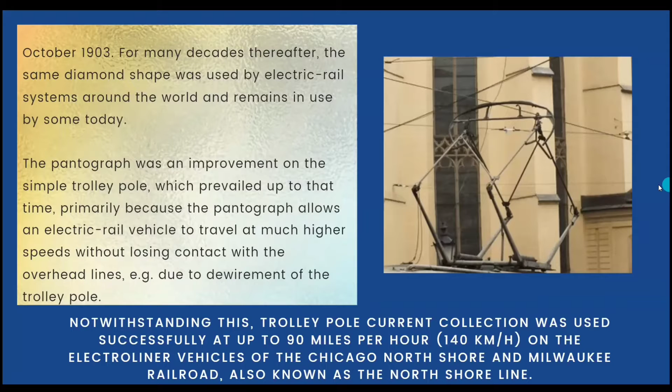Louis Faiveley invented this type of pantograph in 1955. The half pantograph can be seen in use on everything from very fast trains, such as the TGV, to low-speed urban tram systems. The design operates with equal efficiency in either direction of motion, as demonstrated by the Swiss and Austrian railways, whose newest high-performance locomotives, the RE460 and Taurus, operate with them set in the opposite direction.

In Europe, the geometry and shape of the pantographs are specified by CENELEC, or the European Committee for Electrotechnical Standardization.

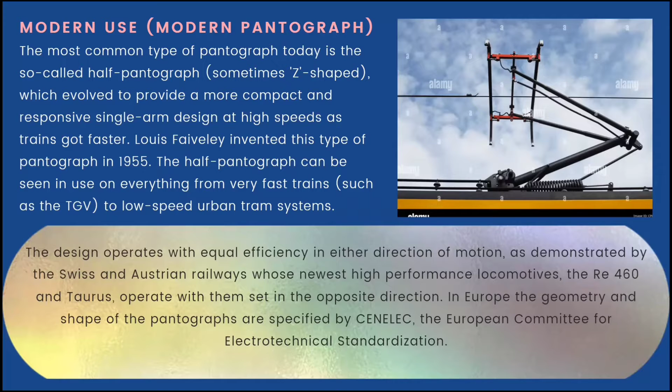Pantographs are current collectors that transfer the electricity from the catenary to the train motor. The sliding strip creates the electrical contact to the catenary wire. A pantograph spring system ensures permanent contact at any speed. Even at speeds greater than 400 km per hour, the high-speed pantograph by Schunk guarantees uninterrupted electric current transfer.

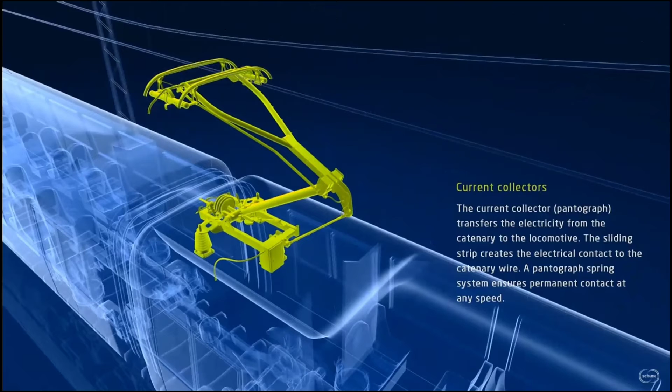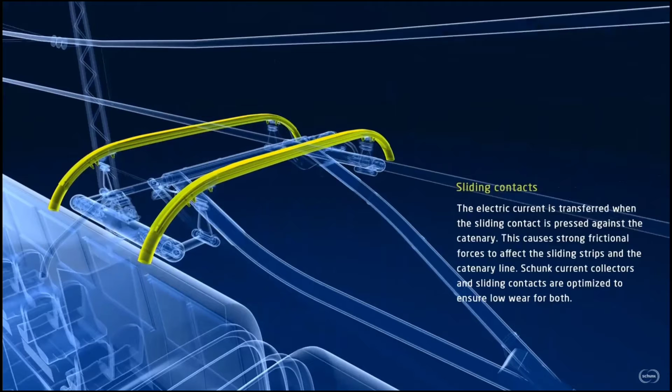The sliding strip performs an important function. As it is pressed against the catenary, it ensures electric current transfer. Strong frictional forces take effect here on the sliding strip and the catenary line. Schunk has designed the structure and the material of the current collectors and sliding strips such that the sliding strip and the conducting wire are subject to a very low level of wear.

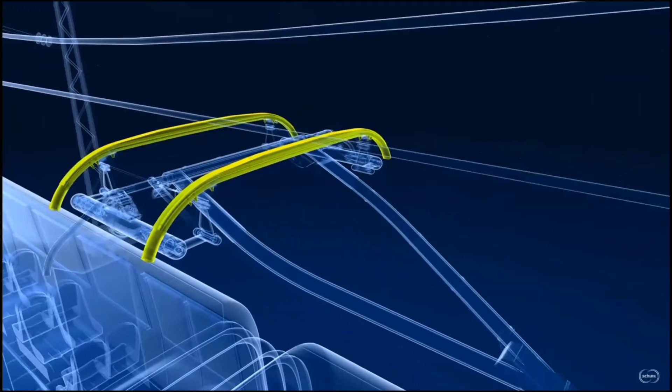Schunk developed an innovative solution for monitoring the sliding contacts of rail vehicles from a central location: intelligent carbon for pantographs. The measurement of sliding strip wear is automated so it is easy to determine when they should be replaced. This is Schunk's contribution to optimum maintenance intervals, meaning fewer visual checks and lower costs.

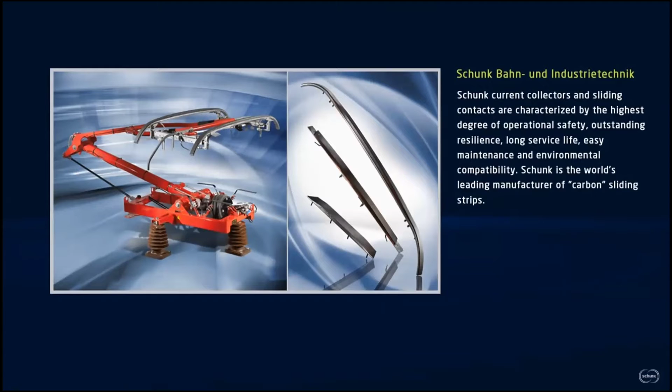The advantages of Schunk current collectors and sliding contacts are obvious: the highest degree of operational safety, outstanding resilience, long service life, easy maintenance, and environmental compatibility. Our success speaks for itself. Schunk is the world's leading manufacturer of carbon sliding strips.

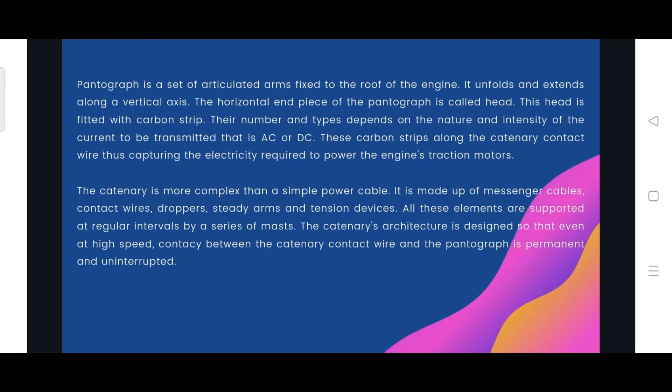Ito yung sinasabi ko na pagka naka-standstill lang yung train, pero yung kaya kanina, ito, it unfolds and extends along vertical axis kasi pagka naka-standstill lang yung train, yung flow ng electricity sa catenary wire hindi siya tumitigil. So yung nag-extend yung pantograph na mismo, tumataas siya o bumababa. May mini-maintain siyang minimal distance o minimal contact yung carbon strip o yung pantograph head doon sa catenary wire. Kasi pagka hindi nila, if not properly maintained yung contact na yon, pwede yun mag-result sa high voltage.

Magkakaroon siya ng electric arc circuit na katulad din sa Jacob's ladder. Mamaya may papakita akong video kung ano yung itsura ng Jacob's ladder o yung electric arc na nabubuo pagka hindi properly maintained yung contact niya sa isang high voltage catenary wire.

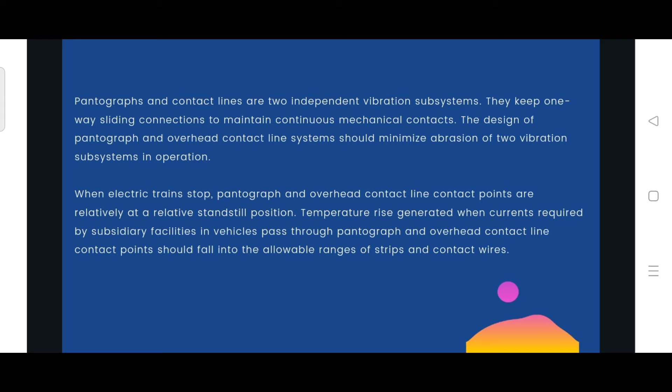In operation of electric trains, sliding contact between strips and contact wires makes transmission of electric energy easier, and continuous charge of pantograph and overhead contact lines point can stop temperature rise of strip and contact wires. Design and characteristic of pantograph have significant impact on the operation quality of pantograph and overhead contact lines.

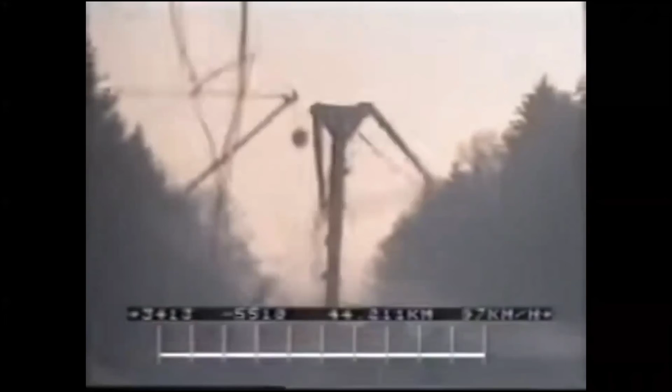So next is double arm pantograph. So double arm pantograph requires an overhead three-phase AC power system. This type of pantograph consumes high power to raise the speed of the train.

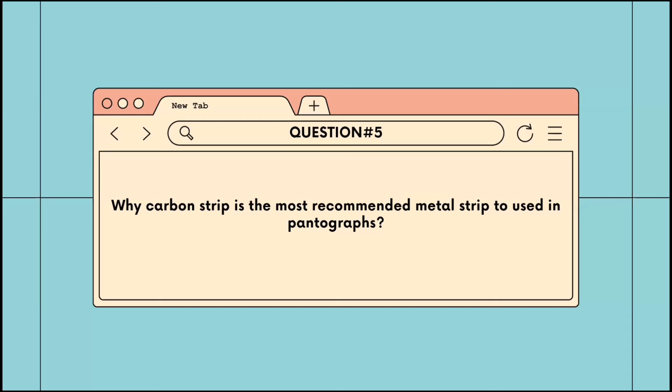Okay, next? Why carbon strip is the most recommended metal strip to use in pantograph? Yan. Teka. Dami nagchat. Kasi mas madali yung conductivity ng electricity dun sa carbon strip. Okay. Qualified answer yan. So, ikaw yung last na nanalo ng 100 pesos.